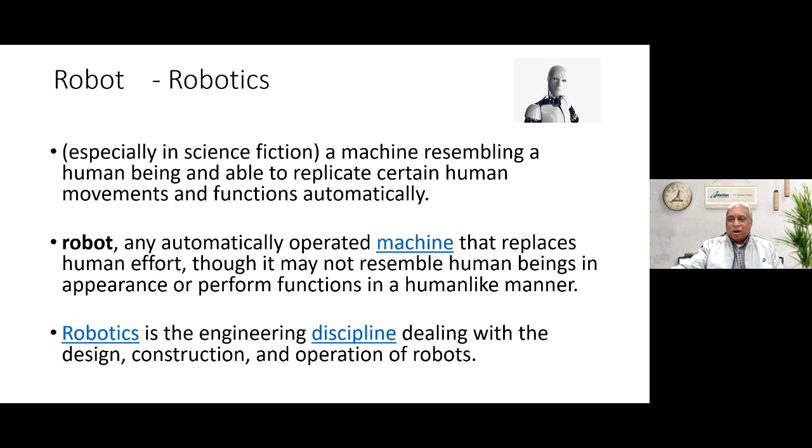The definition we gave for robots was that it's an automatically operated machine that replaces human effort, though it may not resemble human beings in appearance or perform functions in a human-like manner. Robotics is a branch of engineering discipline dealing with the design, construction, and operation of robots. That's what we talked about in the definitions yesterday. The Merriam-Webster definition was also reflected. Those joining today can refer to yesterday's presentations.

A very important thing as far as robot design, construction, and application is concerned: I'm repeating this because the standards for robotics are based on these laws only. Let's once again have a relook at it. A robot may not injure a human being or, through inaction, allow a human being to come to harm. This is law one, which must be followed if you want to design any robot.

The second law is: a robot must obey orders given by a human being, except where such orders would conflict with the first law. So law 2 says the robot must be under the control of the human, and it has to see that it doesn't violate or conflict with the first law. The third law states that a robot must protect its own existence as long as such protection does not conflict with the first and second laws.

So these are the three laws that have been defined over a period of time. We all know that laws need to change over time, so from a futuristic point of view, these laws are to be modified, or some amendment or addition has to be made as part of it.

With the help of new generation IT technology, you can design the robot and the robot can speak in any language, right? But what kind of vocabulary are you feeding into it? And if you want to do translation, how does it happen?

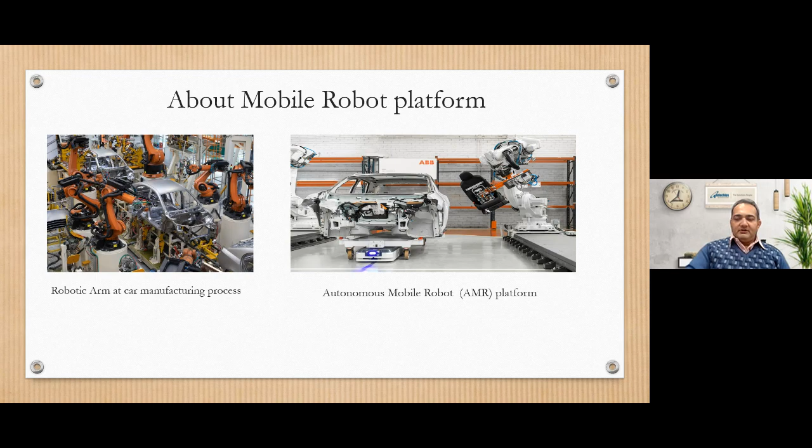So the entire car or any particular tools or objects in the industry are lifted by these particular mobile robots. You've also seen transportation and courier industries using mobile robot platforms which navigate couriers and everything from one place to another. So those are the applications regarding mobile robot platforms.

Whenever you purchase any mobile robot platform, you need to define your application, and based on that, what surface area you want to move the robot on - if it's industry, a rough area, a garden, or floor-based applications. In that case, three, four, or five different kinds of mobile robot platforms exist in the world. First we'll talk about the generalized idea.

I'm going to give you the differential drive - what differentiates this platform from others, and how they provide motion. Motion means you need to move forward, backward, left and right, and in any direction, just like any mobile robot platform moves in your industrial office area. So differential drive means what?

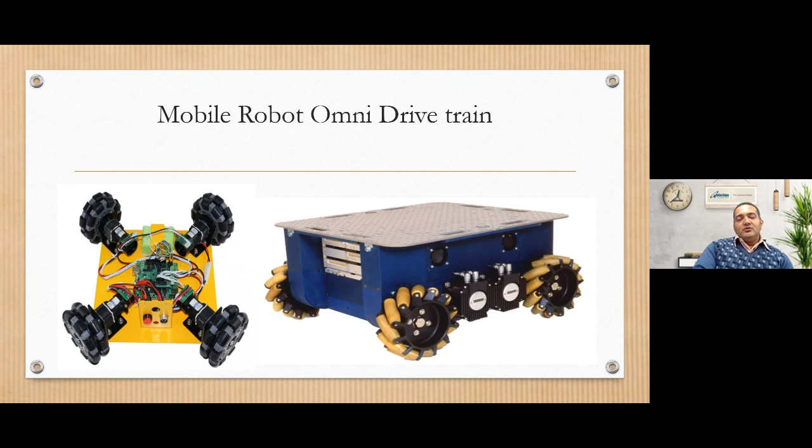The rubber rollers are free to rotate and they help the wheel rotate even when perpendicular to the surface floor, so it can work on almost any floor kind of mechanism. However, it is restricted to smoother floors, and that kind of requirement is there.

The fourth one is rotatable at the same position. That means you can change the direction of each wheel in a particular direction, say clockwise, so it rotates on its own position. It's not going to maneuver forward, left, right, or backward. It just rotates entirely 180 degrees or 160 degrees, whatever you require, at the same position.

This makes it easier to maneuver this kind of mobile robot platform on different floor plans. That is why this kind of mobile robot is accepted by many industries right now, because they are easy to maneuver. So I'm going to show you a demo video of this same omni-wheel drive mobile robot platform from our college premises, so you can see how it moves.

There is no sensor attached to it, so it's not going to consider or see any particular obstacle nearby. It may get stuck with anything, but two different types of robot motion are possible using this kind of omni wheels, as you can see.

So my focus is that you concentrate over here on how the direction of each motor of each wheel is controlled, as well as which motors are stopped and which are not stopped, in such a way as to maneuver in any direction. So just look through the video.

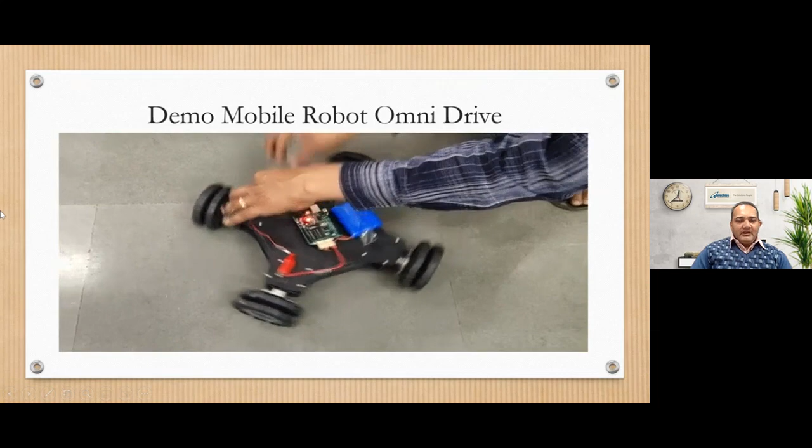It will be running at a faster speed. It's rotating at the same place, clockwise, anti-clockwise, diagonally.

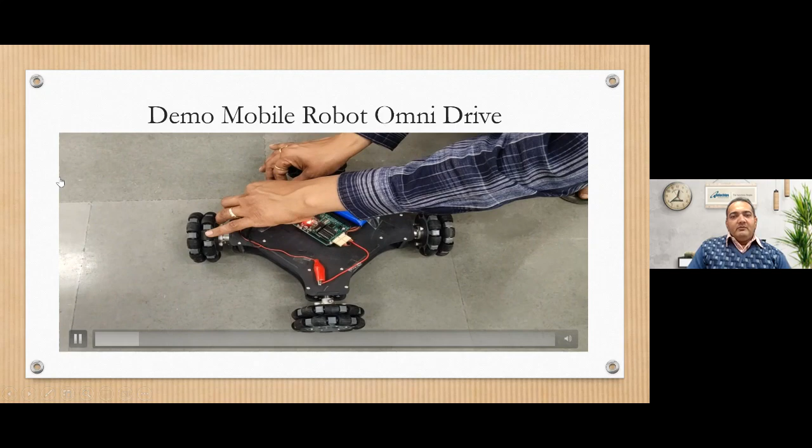As you can see, it is very easy to maneuver this kind of mobile robot platform in any industrial setting. Why? Because it can rotate clockwise, anti-clockwise, or any direction from a given starting position to any ending position. There is no restriction to maneuver them in any direction. But these are special types of wheels, so they are restricted by the floor plan—it has to be smoother. That is the only restriction. It cannot run on a muddy area because there are rubber rollers in between the robot wheel body.

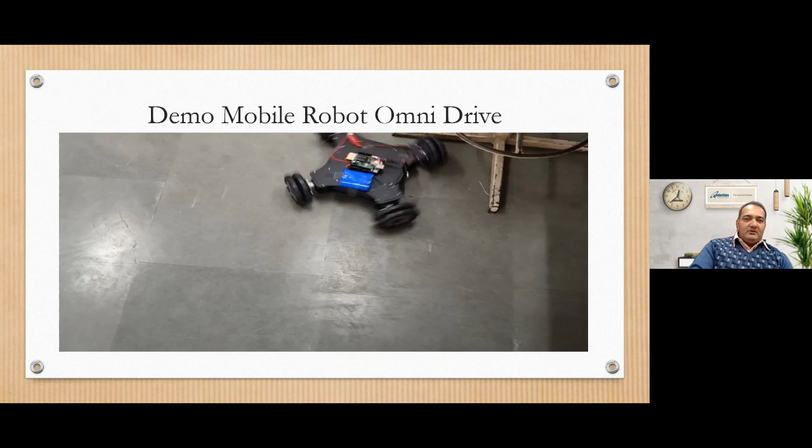You may have seen this kind of robot in restaurants—they come from a starting area to your table, moving only along the guided path in the floor, and that is why they are restricted; they will stop if someone comes in between them. The tracks need to be well defined, and this works well when your industrial plan is fixed for an entire season or for infinite time. But whenever you change your plan or modify your path, this kind of AGV becomes very difficult because you need to change the entire floor plan again to maneuver from point A to a new point C.

So the future is coming like the autonomous mobile robot, AMR. Now people are going to trackless autonomous navigation. They can travel around people and obstacles, and no infrastructure change is required—you can expand or modify them. There is no restriction, only some programming is needed, and they can maneuver within your given new modified floor plan or whatever industrial floor plan has been given. So dynamic navigation is the facility that the autonomous mobile robot provides, and that is why people are moving towards that, because they can maneuver anywhere considering all the decision making of the robot platform.

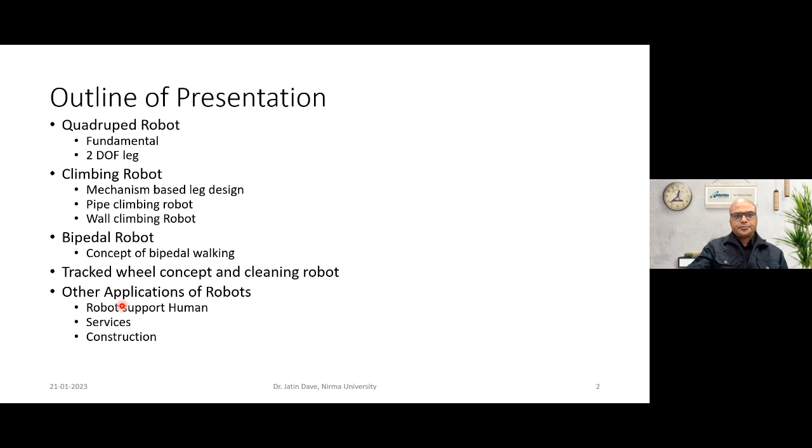Now you have gone through so many classifications in these 2 days, and you are fully aware of the kind of robots which can be implemented nowadays in societal applications, industry applications, defense, etc. Specific to legged robot, from these two initial classifications, manipulator and mobile robot, where mobile robot again has a major classification under wheel, track robot, and leg robot. Leg robot also we can see can be classified into two-leg robot, which is popularly known as bipedal robot.

Quadruped robots are very popular in industry. Many companies like Boston Dynamics and many other companies have already made beautiful robots working commercially. Some of the work is already done in hexapedal robot, which is a 6-leg robot having more stability aspect. Octopod also being used by researchers in many applications.

And we can see that looking at terrain adaptability, energy efficiency, and maneuverability on rough terrain, legged robots are preferred many times over wheeled robots. But of course, it costs you mathematical complications, complex equations, very complicated control aspects, etc. But it depends on your application and requirement, what kind of robot to be implemented.

You can also go through many researchers who are pioneers in the design of this kind of robot. McGhee was one of the researchers, which I didn't mention here, but Hirose is again one more pioneer in the quadruped robot. One of the statements you can find in his research work is that quadruped robot is the best form of legged robot from the aspect of stability, control difficulty, and manufacturing cost. That's why it is popular nowadays. You can see the very beautiful robots made by NASA and Boston Dynamics.

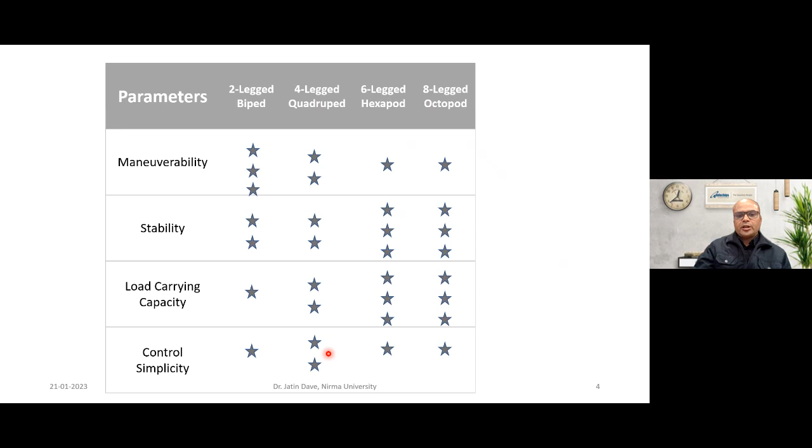While you will find this 4-legged robot, quadruped robot, will be in between all these other 3 kinds of robots. Maneuverability can achieve some sort of simplicity, and all kinds of orientations are possible. Stability will be slightly less compared to 6-leg and 8-leg robot because you have only 4 legs, and many times there is an issue with the center of gravity and the walking pattern. Load carrying capacity will be limited because you have only 4 legs and 4 points will be in touch with the ground, so that is going to limit your load carrying capacity. Control simplicity will be slightly achievable because you have 4 legs, and if you have a symmetric walking pattern, then your simplicity in control can be achieved.

If you want to go into this domain, what kind of research areas can you explore in legged robots more generally, not only limited to quadruped robots. You can start with understanding the walking of animals. Gaits are walking patterns - how do you sequence your steps, that is defined as a gait. Many varieties of gaits are implemented, like continuous and discontinuous, which we'll see defined in upcoming slides. People are also working on having all kinds of orientation while walking, which they call omnidirectional.

People also implement body sway motion while walking so that stability is achieved always. People also work in the area where if any legs are not working, they call it fault tolerance gaits - so even with 3 legs, the robot can work properly and you can retrieve your robot for maintenance purposes. You will also find research in slope and stair climbing.

Another issue is the control architecture - what kind of control, and nowadays how to implement AI and machine learning to work in uneven terrain or more complex working patterns. So these are all research areas you can explore later on if you are interested in legged robots.

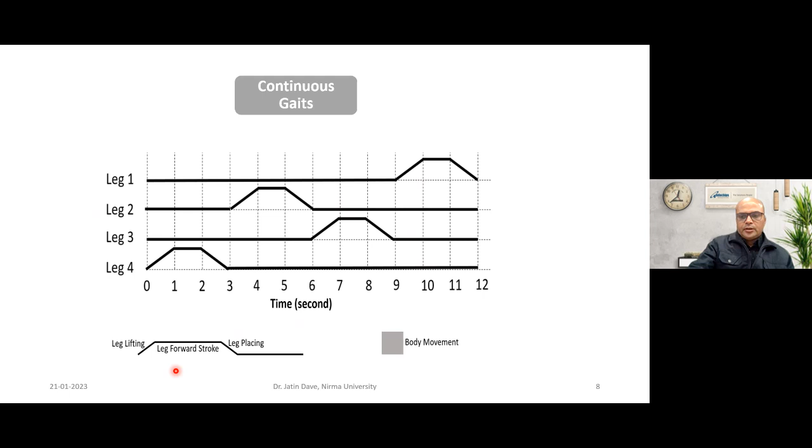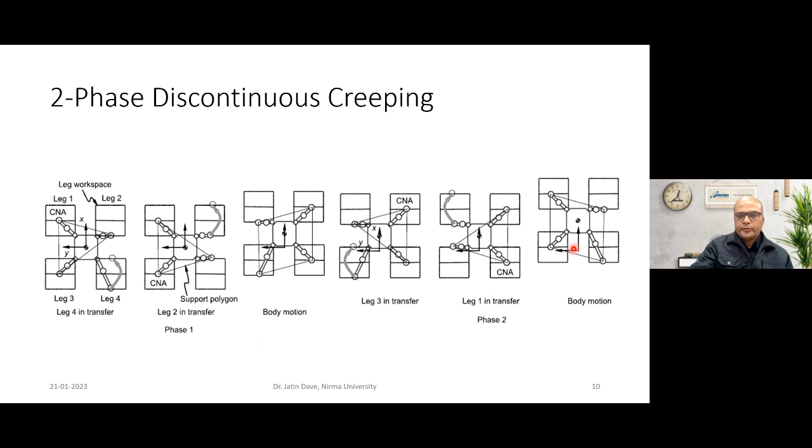Now the question is, how can you understand whether your motion will be stable or not? For that, people have used stability margin as a terminology. Stability margin shows the position of center of gravity. Now, as the statically stable gait, we defined that the center of gravity must remain inside the foot polygon, the polygon formed by the foot tips which are on the ground right now. You will achieve statically stable gait pattern always when your center of gravity remains always in the foot polygon. So it is statically stable stability margin, which is short called SM.

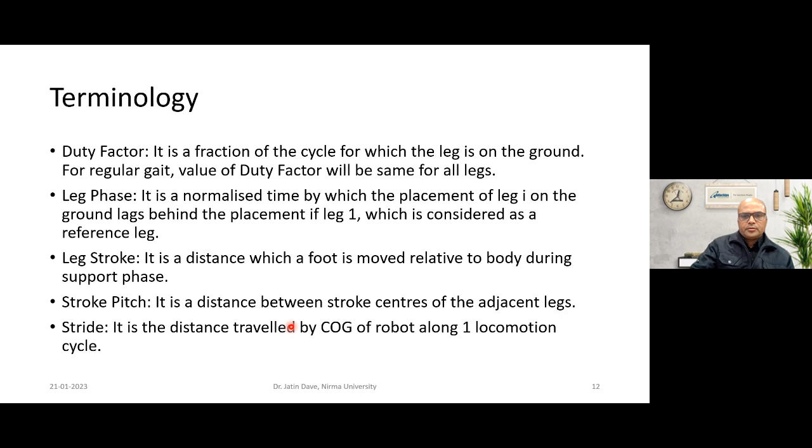Now let's go to some basics of geometric modeling, the coordinate system assignment, and how we can come out with the kinematic equations, etc.

You can provide symbolic variables like L, which shows the body length, and W, the body width. Then Rx and Ry are your workspace distances. Rx is the distance of the workspace in the X direction, and Ry is the distance of the workspace in the Y direction. So Rx, Ry provide the leg workspace indication, whereas L and W provide the body size.

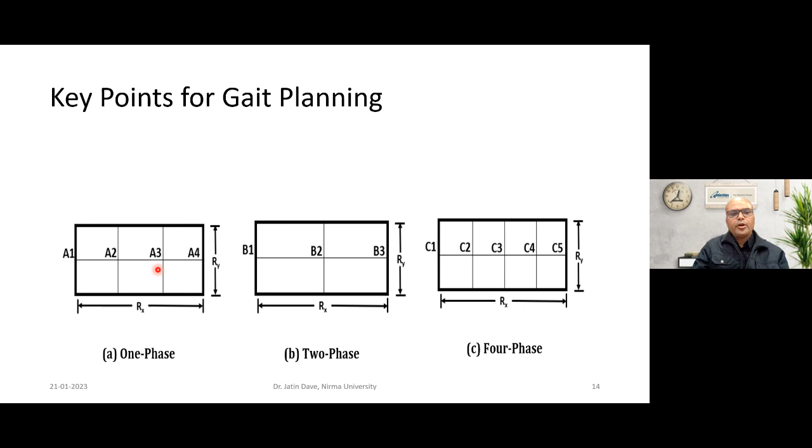Suppose this table shows the event sequence of one-phase discontinuous gait. Remember, our points will be A1, A2, A3, A4 in one phase cycle. Let's say we start at 0 seconds; 6 seconds is the time given for a leg to move forward. Let's say the event starts with leg number 3. Leg 3 will move from A1 to A3, whereas the other legs are on the ground at points A1, A2. You will have a similar workspace for each leg, and A1, A2, A3 are the points of the workspace, so A1 to A3 is the motion of leg number 3 in event number 1.

Then the event for leg number 4 will start; leg 4 will move from A2 to point A4, while the other legs remain on the ground. Similarly, leg number 2 will start, A1 to A3. After that, leg number 1 will start, A2 to A4. Now, as this is one phase, after the completion of all 4 leg motions, the body moves forward, and all 4 legs change position to the subsequent adjacent point. This cycle repeats after that.

Now let's go to 2 phase. From 2 phase, we know that the body has to move 2 times within the cycle. Let's say we start with leg number 4; leg number 4 will move from B1 to B3 point.

Leg number 2 moves from B1 to B3 point. After that, body motion takes place, so all leg points will change. Again, the remaining 2 legs, leg number 3 and leg number 1, will take place motion, and again the body will move forward. You will have coordinates each time, and these coordinates will help you identify the angle of a joint. Let us see what that is.

This table shows the 4-phase discontinuous gait. From the previous two tables, I hope you are able to understand how the motion takes place. The name indicates 4-phase, so after motion of each leg, body motion takes place. Leg number 4 motion, then body motion, leg number 2, again body motion, and it follows in a similar manner. So if you go for 1 phase, 2 phase, and 4 phase, your number of points will be increasing, and each time you have to do computation to find out the joint angle.

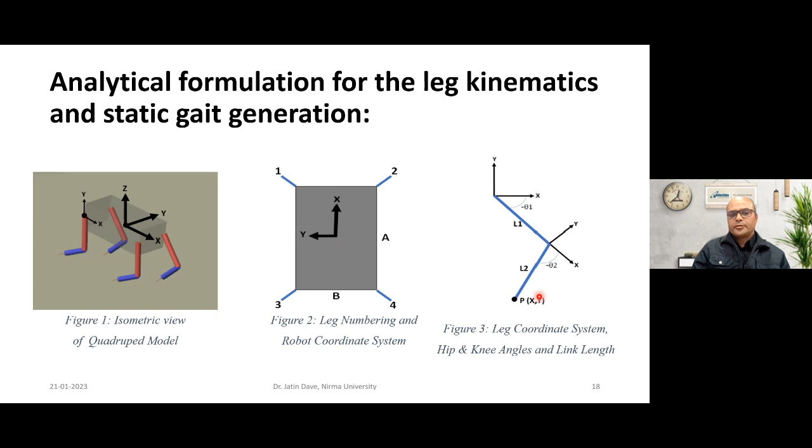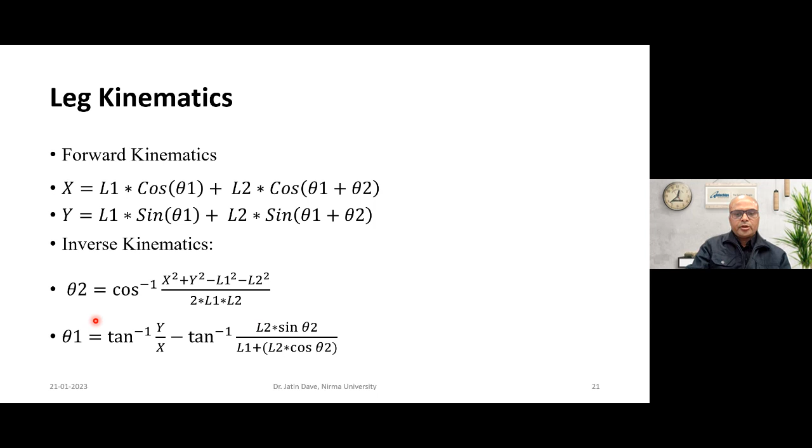From the table, our input is the coordinate x,y, and the length of links is known since we know the size of the robot, and from the available environment we can decide the dimension range of the robot. So x,y works as input. Our points 1D to 5D and 1U to 5U provide the value of x,y. This works as input to find theta2, and based on theta2 we find theta1. This is the inverse kinematics, and the values of joint angles theta1, theta2 will always be available to move the revolute joints and subsequently the body of the robot.

For example, we defined this terminology earlier. Duty factor, labeled as beta, is taken as 0.75. Leg stroke is 14 centimeters. Leg swing is defined as 4231, the gait pattern popularly labeled as wave gait. Leg phase: leg 1 is taken as reference and the ratio of the other 3 legs follows the 4231 sequence - 0.25, then 0.5 for leg number 2, 0.75 for leg number 3, with reference to leg number 1. Stride length is 14 and cycle time is taken as 12 seconds. Lambda is a factor defined by R divided by beta, which comes to 18.67.

Let's go further. Now how to implement this? Initially you have to work on paper to formulate your equations for the forward kinematic solution, then achieve the inverse kinematic solution. Then you know what coordinate values are required, so from the table you get the value of x,y for any selected phase - 1 phase, 2 phase, or 4 phase. Then you put everything into an algorithm form. Software can be anything like MATLAB, Python, or others as per your convenience, but an algorithm is required. Here MATLAB environment is taken to carry out the simulation, since MATLAB has a strong robotics toolbox, so we put everything in the robotics toolbox and do the coding.

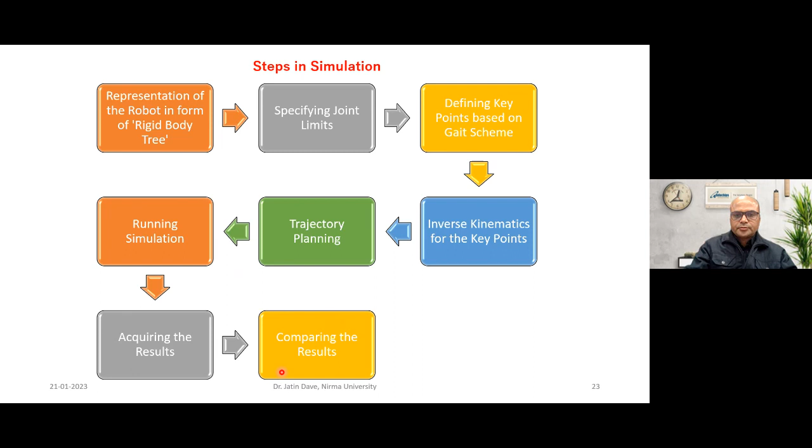Here the live coding I may not be able to show you, but a snapshot I have taken for your information.

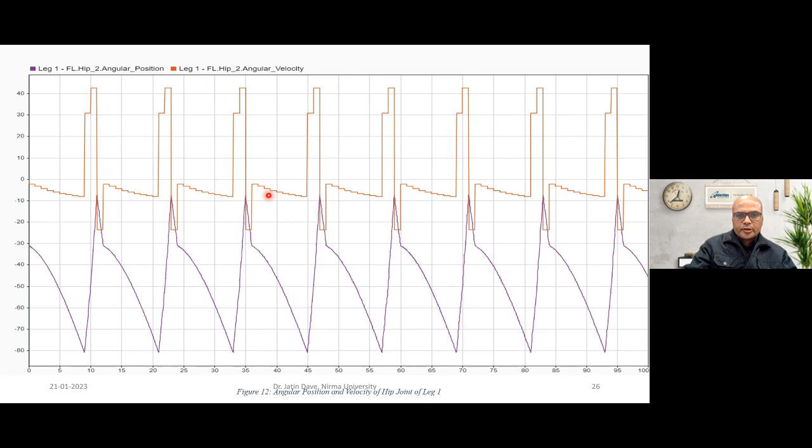This diagram shows the angular position variation, like leg 1 angle, which is a hip angle, then hip 2 angular velocity and leg 1 hip angular position. So angular position and angular velocity are plotted here. You can see that a symmetric pattern is followed for both angular position and angular velocity, which indicates that your motion is symmetric, following the sequence of the gait diagram designed by you. Also not having variation, so smooth motion of the robot will be achieved while completing the entire cycle. That is the gist of this analysis.

So we tried to implement this with a very simple fabricated initial robot. Let us see. We calculated all this in MATLAB, and then we interfaced the hardware, and we implemented the angle values, and you can see that statically stable motion is achieved here. Okay, let's move forward.

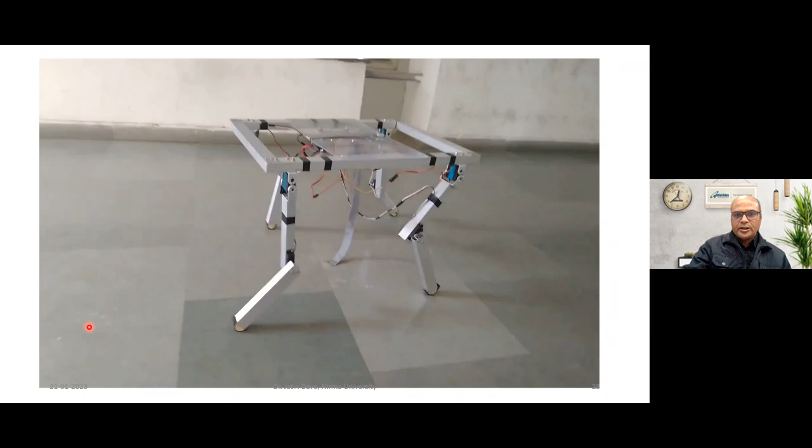This particular robot is made for a 3 degree of freedom leg. Each leg has 3 degrees of freedom, with 3 joints. You can see here we have vertical motion, then subsequently joint number 2 on the horizontal axis, and then joint number 3.

Here also we try to implement body sway motion. You can see that the body is also moving in a zigzag manner. Now it is going to the right side. Again, 2 subsequent legs move forward, then again the body goes to the left side. So body sway motion helps in maintaining stability.

You will get a beautiful robot, a beautiful design, from many research institutes like Boston Dynamics. But there is always scope for research, because we may not know what limitations they face. Only by doing research and thorough brainstorming are we able to know what kind of limitations are imposed on all these commercially available robots. They look very good in moving, but when you start your research, you will always be able to find the research scope. And that's what we are doing right now.

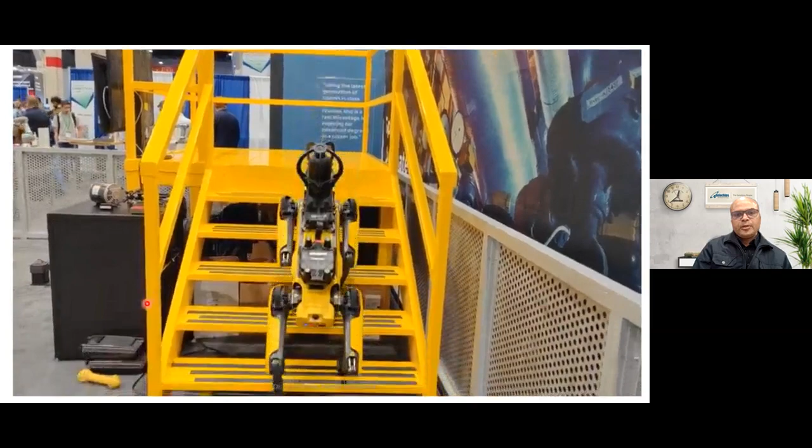This was the motion here. You can see that the body remains inclined, almost parallel to the slope of the stair. Sometimes while doing societal or industrial applications, when carrying a payload, we may not allow the body to be inclined. So you may think about how to maintain the body horizontal.

You have already worked on that. In this presentation, I have not kept all the research aspects. My purpose is to provide you the case study here, which could be simple for you to understand.

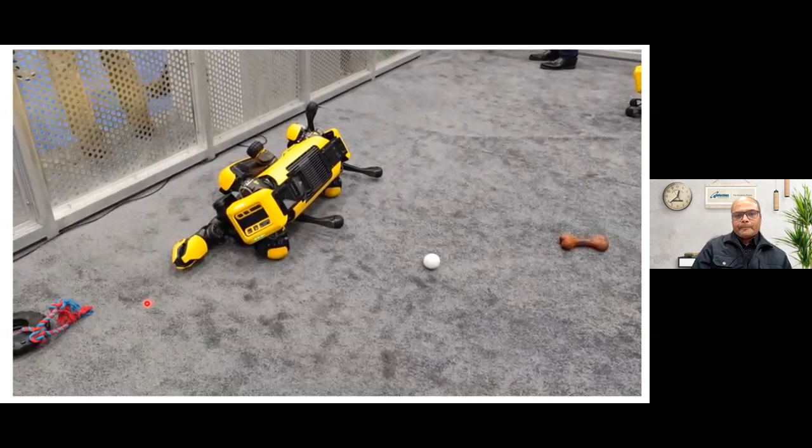So kinematics is the first step, then control comes into picture. You can see the complex control implemented here. That was the task of other team members who belong to instrumentation and electronics. It's entire teamwork, not the work of one man. You need a team.

Other case study which I would like to show is mainly structural climbing robot. This area is also very important, looking to the manpower requirement, safety of the manpower, reducing repetitive nature, and also providing assistance to the manpower which are climbing on a variety of structures.

You can take the case of a tree climbing robot where people go to great heights to pluck fruits like coconut. People also go to height to carry out maintenance work. Frequently, people cannot go up and down repeatedly. So if you devise some kind of robot which can go upward and provide assistance to the human, it will be very helpful to society.

So this is a kind of introduction which provides you motivation to work in this area. Risking human lives is the foremost motivation for us.

The example taken here is the telecom market. Many tasks are predefined. You need to follow steps to carry out maintenance, and we can take help of automation and robotics to carry out all these tasks.

If you go to do research in finding what kind of climbing robots are available, you will get a lot of variety. People all over the world are working here. But climbing robots are very challenging, so you will always find a research gap, and you can define your own objective and propose something which can be helpful to people.

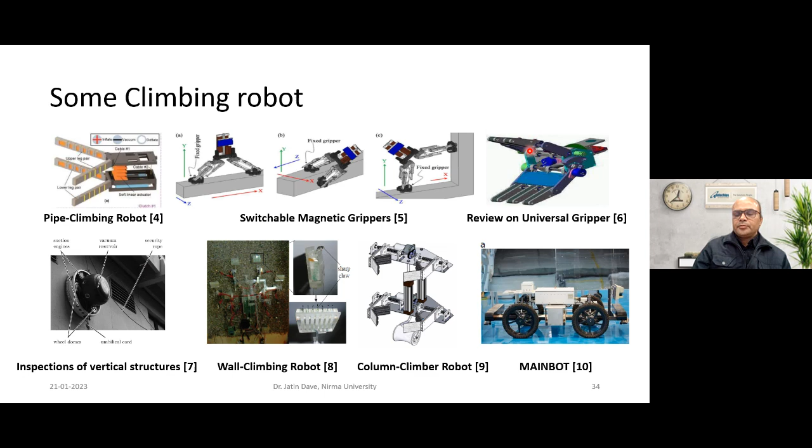So the problem statement is shown here. Particularly, as I told you, the concept taken here is to climb a ladder, which will help to do some kind of repetitive work for climbing the ladder of a telecom tower. And you are very well aware that climbing a telecom tower is very difficult, risking human lives.

Injury takes place. Carnivorous birds may be present at height. Weather conditions, electric shocks, burning of the telecom tower, which costs very costly instruments. So it's very important for us to come out with some kind of robotic application.

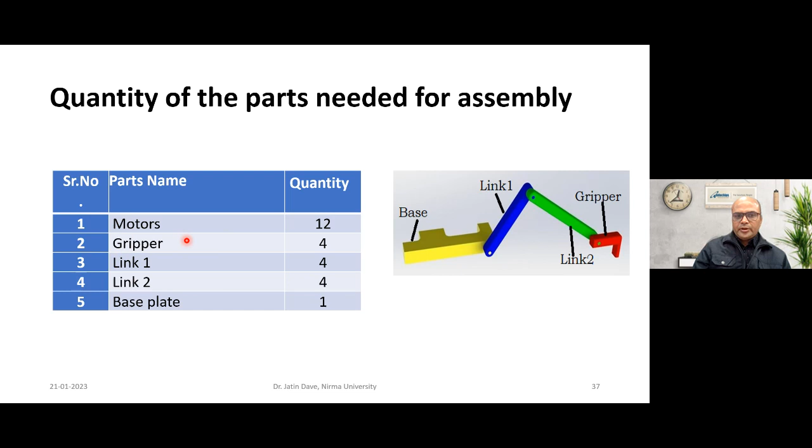Components are listed here, which of course we have not successfully implemented so far, but we try to implement in our study. Initially we have taken only a few components because concept implementation is very important in our initial phase. So our purpose is to design the gripper. As I told you, it is important. Other components can be taken care of, but gripper design is important.

Now, being a mechanical guy, I always start with mathematical modeling. From the basics of robotics, if you study robotics, you know the DH table, the Denavit-Hartenberg table. Denavit and Hartenberg were very important researchers in the 20th century. They provided a way of analyzing motion in 3 dimensions.

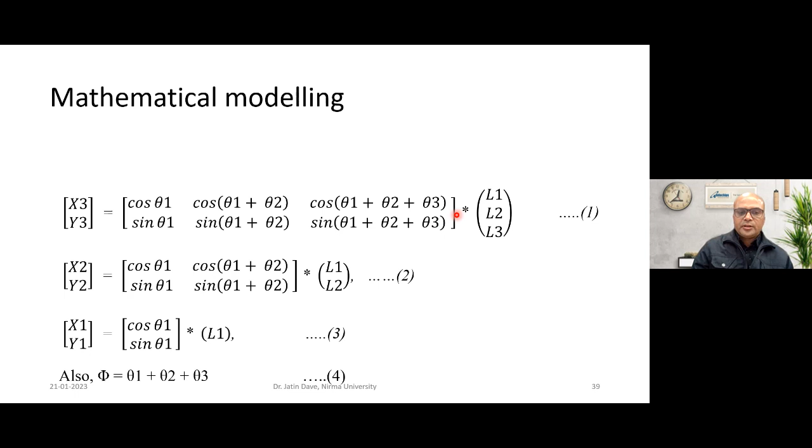This robot has 3 joints, so your mathematical model will be in terms of a matrix. Our ultimate goal is to know the XY location. So the ultimate matrix you will find is in terms of XY location here, showing the location of point number 1, point number 2, and point number 3, each as a function of the 3 joint angles, theta 1, theta 2, and theta 3.

Now it's important to know the value of joint angles always, because points are working as input. In the previous example also, I showed you that XY locations are input to us. Our interest is to know theta 1, theta 2 and theta 3, so that this works as input in our controller and subsequently runs an actuator for us.

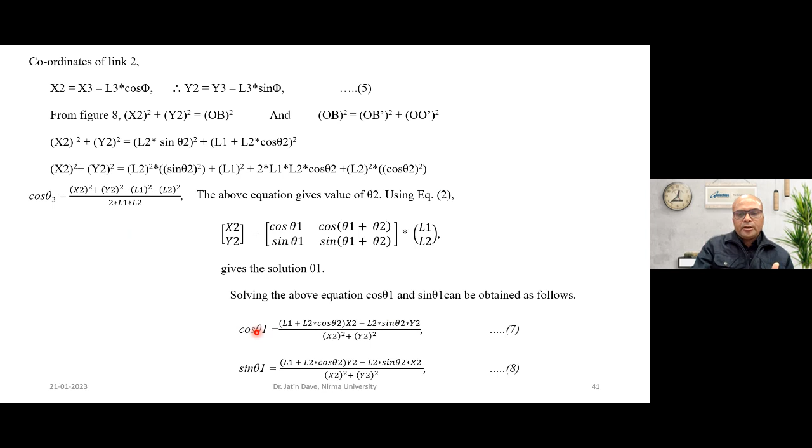By going through the inverse kinematics concept, we are able to know the equation for theta 2. Here also you can see that x2y2 is the input. Then subsequently, moving from theta 2, you are able to know the solution of theta 1 and subsequently get the value of theta 3. So once you know the equations to solve theta 2, theta 1 and theta 3, it is very easy to convert your equation into an algorithm form, write a program, run the program, get the value of the angle, and then interface your device to actuate your servo motors.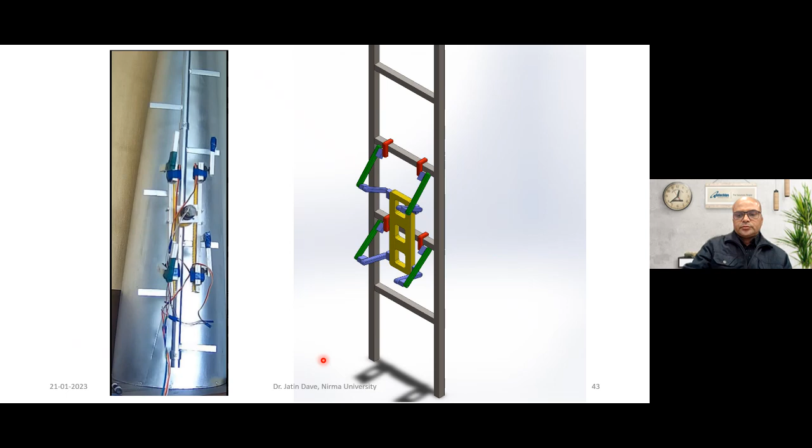Another research area is the pipe climber robot. You will find a lot of tanks, very huge tanks, maybe very huge in height and also depth - underground tanks for storage of normal liquids, industrial liquids, or very hazardous liquids. So it's always a problem for humans to carry out maintenance, to carry out inspection, to go inside and see the condition of our devices, etc.

You will find a lot of companies, not only in the world, but in India as well as in Gujarat. This Gridbot company is in Gujarat, near Ahmedabad, which is in the area of fabricating robots like this. So one application of this company is the pipe climber.

It is designed for magnetic surfaces. You can see that ferrous material is used here - a magnetic pipe surface robot with a payload up to 5 kg. Most extreme temperature surface conditions are taken care of here. It is mainly for surface inspection, weld inspection, painting, coating, grinding, etc.

They are using a geared motor, a pedometer, an IMU sensor to track the motion, etc., and also ultrasonic sensors to measure the tube thickness, reporting in real time based on computation. So many other concepts we can implement with reference to measurement, data transfer, etc., as per your application. But coming up with the concept is important for us.

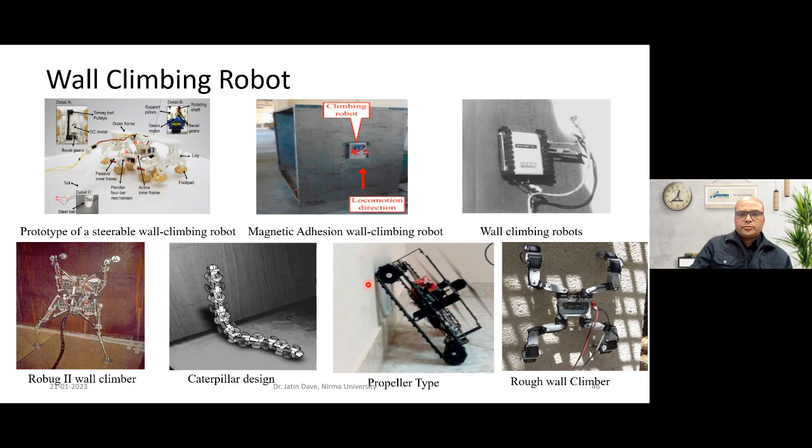One case study I would like to take here is the simple design of a wall climbing robot. Of course, equations will come into play, and mathematics will be involved. The equations will be very difficult for you, but I will help you understand how to begin, as I'm dealing with a case study.

Coordinate systems are always required, whether you work with an industrial manipulator robot or a mobile robot. Again, in mobile robots, whether you work with a leg robot or a wheel robot, a coordinate system is always required to map your coordinate with the global coordinate system, down to the coordinate system of the wheel or leg, which will be changing always. So you need the solution of forward kinematics, and you also need a dynamic equation to understand the variation of torque in each wheel.

Also the requirement of velocity and acceleration of the entire robot. A popular mathematical formulation is the Euler-Lagrangian formulation, which helps you arrive at the dynamic model of the robot, and that will ultimately provide you the torque variation. The coordinate system is shown here in this figure, and now I will show you the equations directly, how this Euler-Lagrangian formulation is implemented.

This Euler-Lagrangian equation requires kinetic energy and potential energy. Kinetic energy combines both linear motion as well as angular motion. The angular motion will be in the wheel, so 1/2 I omega square is the kinetic energy that comes from the wheel.

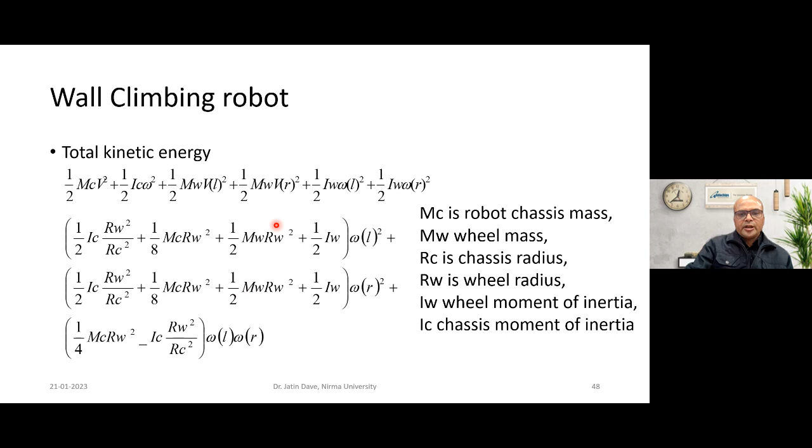Then mgy is the only potential energy. So you take your kinetic energy from the previous equation and this potential energy from the height achieved by the robot, which is y, and mg provides the weight of the robot. Let me show you the equation if possible here.

I will try to write it in a rough manner here. So your Lagrangian equation will be something like this—it's a partial differential equation with respect to time, with the Lagrangian equation denoted by L. So it is d/dt of (dL/d theta dot) minus dL/d theta.

Okay, that is equal to our force or torque value. Parameter L is called the Lagrangian operator, which is given by the difference of kinetic energy and potential energy. So first you obtain parameter L, and then you apply this equation to know what is the force and torque value. So like this you are able to get the required dynamic equation to know the torque value.

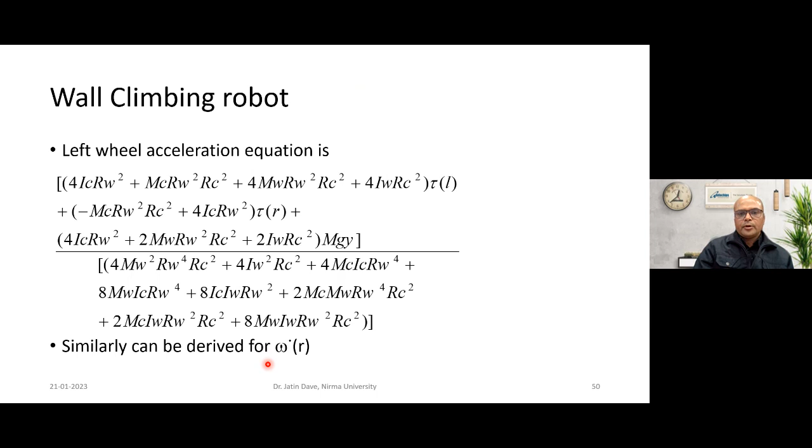That is what we have done here. We obtain acceleration value from this equation for left wheel as well as right wheel, and then it is given in Newton's second law of motion, because torque is equal to I into omega dot, or F is equal to ma. So that will give us the required torque value. So linear acceleration is obtained, angular acceleration is obtained, ultimately force and torques are obtained to know what is the actuator requirement in this wall climbing robot.

Further, you need to know what kind of forces you may come across while climbing on the wall. This FA is the adhesion force, because you are selecting a centrifugal rotor to create a vacuum. So you must know what is the pressure requirement, so that you are able to create the vacuum and select the proper fan, and know what rotational velocity is required to create a vacuum. For that, this adhesion force is the foremost parameter required.

You also need to know what kind of opposite reaction will be obtained. So FSB is the reaction force. Further, we also need to know what friction we have to come across. So this Ff_eb shows the friction force that is required, and this Fs_eb is the normal reaction force, based on the friction value. G is the weight of the body, which is always going downward, opposite to motion.

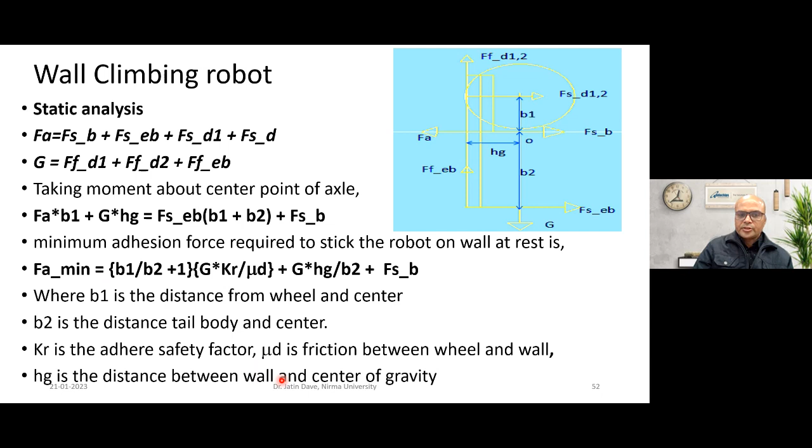We keep G and Kr constant, and we can come out with some conclusion. So to minimize the required necessary adhesion force, the ratio of b1 by b2 should be as small as possible. It will cause more driving force on the wheel tire. That is our observation here in this project.

Some reduction in Hg is also another option, reducing the distance between the wall and center of gravity, because as you are nearer to the wall, you can easily provide suction, but it is limited to your design. Sufficient suction should reduce the support body force as much as possible, and G is the gravity force. These are the nomenclature used here, so these are our observations in this equation.

Dynamic analysis is also implemented here using the d'Alembert principle. We have taken four components in this equation: gravity of the system G, contact body sliding friction Fs, edge body sliding friction EF/EB, and inertia force Ma. From this, we are able to derive some conclusions.

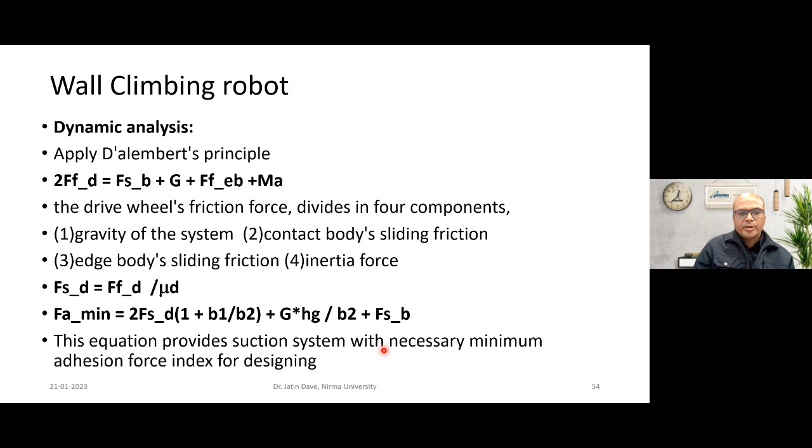This equation provides the suction system with the necessary minimum adhesion force index for designing. So ultimately we are able to know what is the adhesion force, and what is the requirement for creating suction pressure.

From this, we are able to select the proper rotor and determine its RPM. Accordingly, from the torque available from the dynamic equation and the dynamic analysis, we are able to select the proper drive motors which will take your robot either upward or downward of the wall. So these are the initial mechanical analysis required before you go into the other electronics interfacing aspect.

The third case I would like to take is how to go into bipedal motion. Again, the very popular Boston Dynamics robot is shown here, but we are learning, so you must know the fundamentals when you go into designing.

If you understand human walking, when we take one leg in the air, the other leg is on the ground. That means we are in a single support phase - one foot is in the air, the other foot is on the support.

Then we put our other leg on the ground and move slightly forward before going to the second leg, and in this manner we move forward, and our brain maintains stability always. So this is the normal motion.

When both legs are on the ground and your CG slightly moves forward, it is the double support phase - both legs are on the ground. So ultimately you need equations to analyze single support motion and double support motion. That is the entire logic and engineering understanding working behind this.

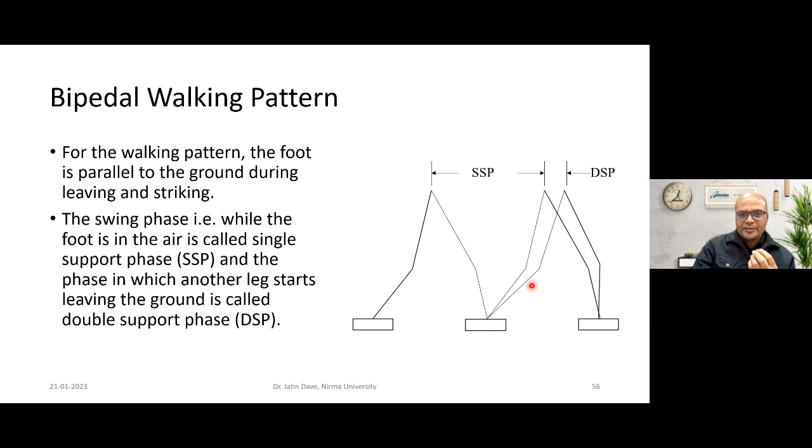People popularly take the inverted pendulum model or the linear pendulum model to simplify the control equation to arrive at the dynamic equation. Initially, in single support phase, one leg is on the ground, the other leg is in motion, so it is an inverted pendulum - we are only on one leg and our entire body is swinging. So it's a single support phase.

Then both legs are on the ground and the body is moving, so you are like a simple pendulum - that is the double support phase. This cycle repeats: single support phase, double support phase, single support phase, double support phase, in this manner.

So you can take the CG of the human body. You have weight working downward, and you have inertia force opposite to your motion, which is mx double dot. Mg is your support. One popular term we come across in bipedal motion is the zero moment point.

The zero moment point is the point on your foot when it is on the ground, and the moment about that point should always come to zero - the summation of all moments. That means this point ensures equilibrium, that is why it's called the zero moment point. Humans always have a zero moment point; nature has devised our motion such that our foot always ensures a zero moment point.

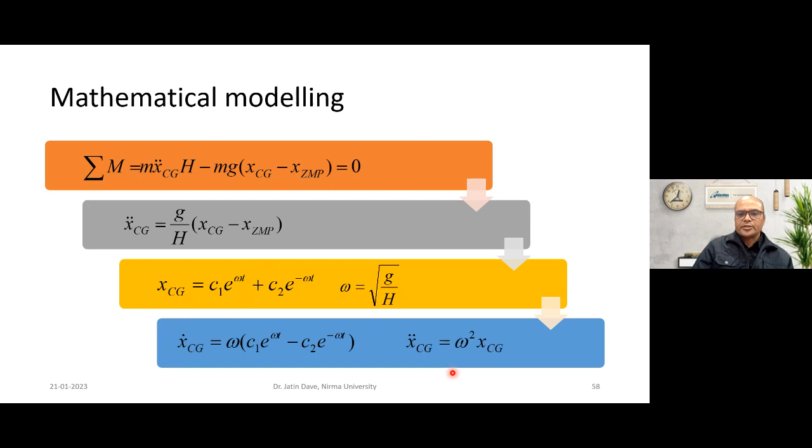It's just like our normal vibration problem, and you are able to very easily get C1, C2 by providing some boundary conditions - one boundary condition is not shown here. Based on this equation of Ax, you are able to get velocity and acceleration. So the rest of the task is very easy.

Now coming to the double support phase. Double support phase is a motion like a pendulum. You're able to get this kind of equation using the same approach: apply sigma M equal to 0, simplify the equation, and you get the equation of the double support phase.

In double support phase, both feet are on the ground, so whatever x is provided, that will be the zero moment point. Suffix d indicates double support phase. xd is the position of CG during double support phase, Hd is the distance between CG and tip of the pendulum, and x_zmpd is the position of the zero moment point during double support phase. Here, one constant ad is taken to govern the walking pattern.

The solution of this differential equation is well known to us from mathematics, so we are able to solve it.

We have the stride length, and we know the step length. So S works as the step length. I can divide the step length into two parts: the step length of single support phase and the step length of double support phase, and the summation of Ss and Sd gives the total step length. Alpha is based on the ad constant.

The previous slide defined ad, which governs your walking pattern, so you can take it as per your convenience. You just vary the value of ad and observe what kind of walking pattern results, stable or not stable, and from that Hd can be obtained. Hd is the height of the CG of the pendulum from the ground.

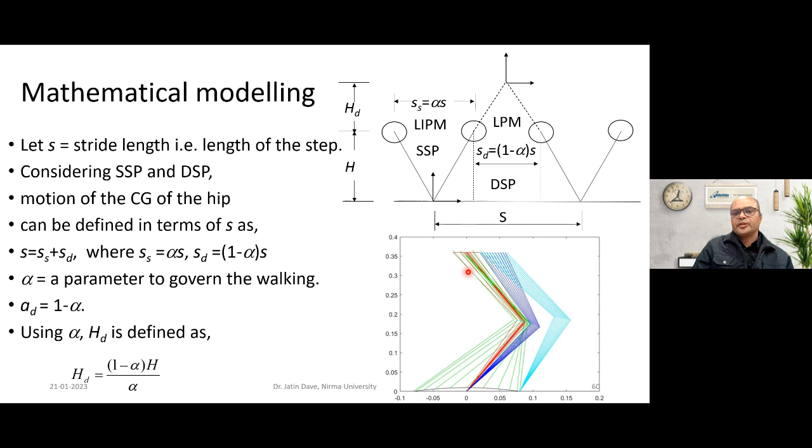We also tried to fabricate this kind of robot, not successful, but this is the list of components shown so that you know what kind of peripheral electronic devices are available. We tried a dynamixel motor here, batteries, and sensors are all shown here. A dual shaft metal gear motor is selected for this, along with a 3-axis linear accelerometer and a triple axis accelerometer gyro sensor.

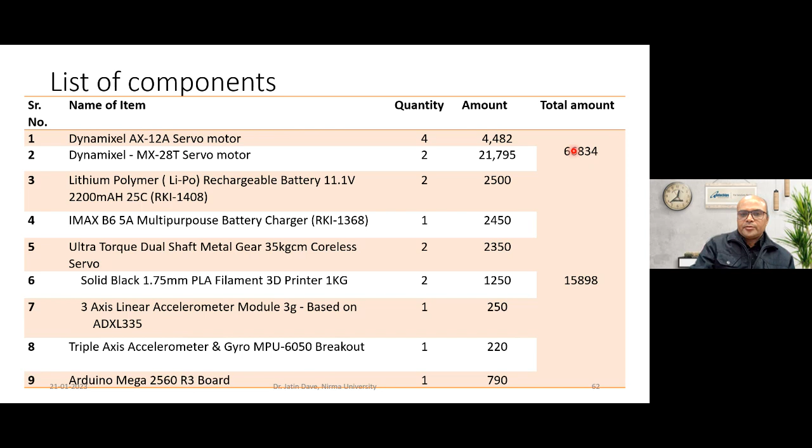An Arduino Mega is utilized here. Total costing comes around 80,000 for a small robot, so you'd need around 1 lakh at today's cost. This cost is from around 2017, and that snapshot is shown here.

Sometimes, we may take up that part also.

They implement ultraviolet disinfection, which can completely clean 99.9% of microorganisms in a hospital within 10 minutes, and use different kinds of sensors like lidar to create a map of the environment, etc.

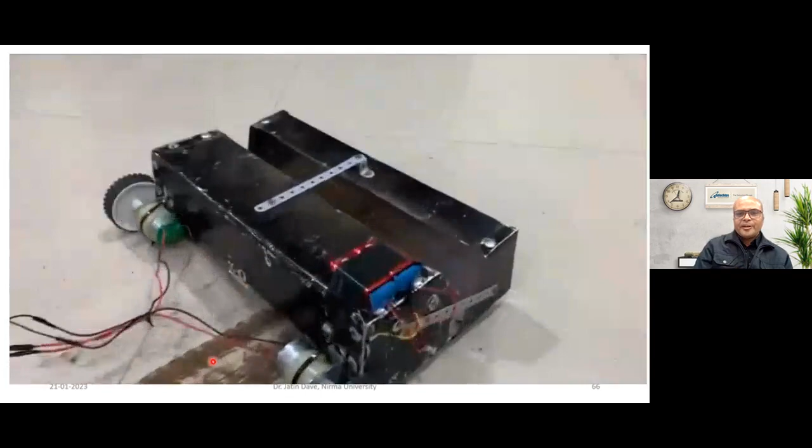We also tried to implement a cleaning robot in our laboratory on a small scale. Not many sensors are implemented here. We just tried to implement the motion initially, and it is also being extended by our other students to do it in a more sophisticated way.

UV is very popular in disinfection. Hydrogen peroxide and plasma air filtration are also utilized by people in some areas. Hydrogen peroxide misting is very effective for full surface coverage and is used for room service and deliveries in hotels. But we need to take care of safety while using these kinds of disinfection measures.

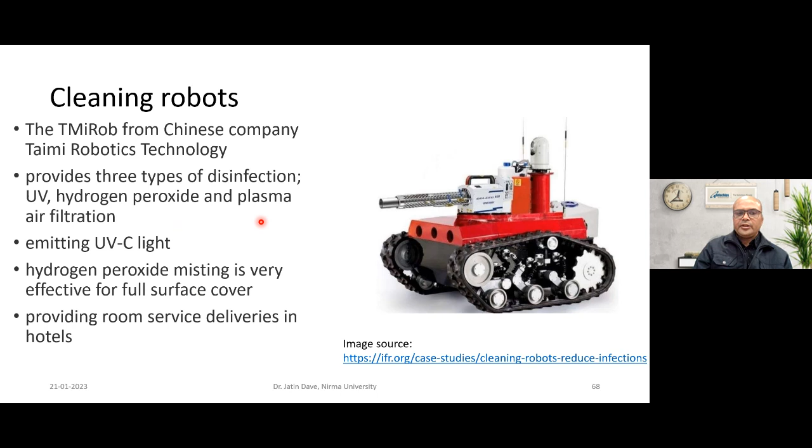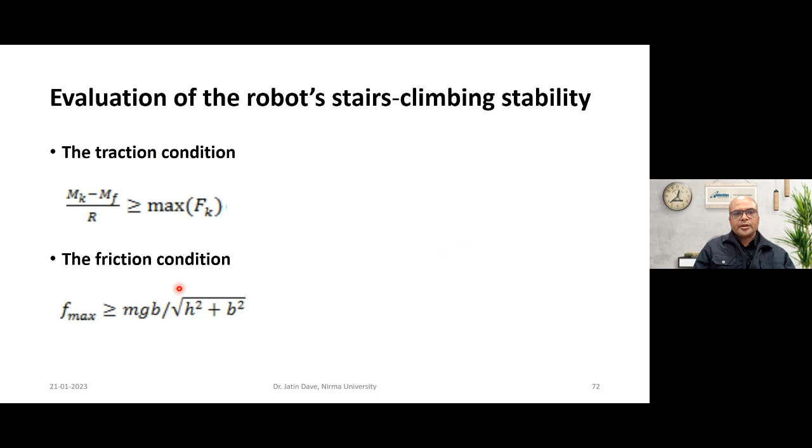Many kinds of helping robots are also nowadays available. So you have a wheelchair with a robotic arm implemented on it, providing a joystick or remote control in the hand of the person, and that person can easily move the robotic arm to do routine tasks.

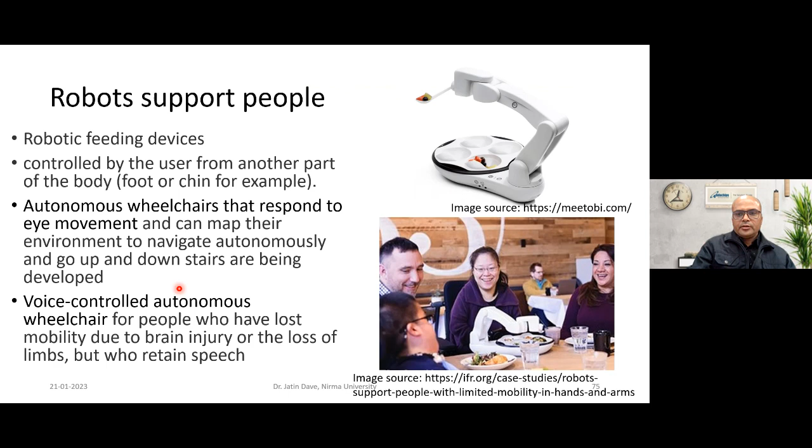People are also nowadays manufacturing feeding robots. Suppose the person is suffering from Parkinson's or a stroke, or doesn't have a hand - they feel very bad when they go outside. This kind of robot provides help and some emotional empathy aspect to these people. I'm not involved in all these projects, but I'm showing you slides to provide information on what we can do.

Our team also tried to make this kind of robot. Initially a 3D simulation of the feeding robot. A lot of kinematics is involved here, and genetic algorithm is implemented to smoothen the motion of the joint.

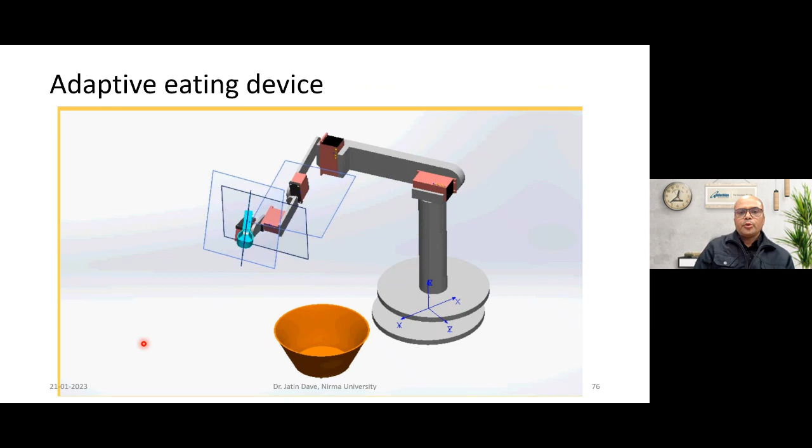Because you cannot allow the food to spill off from the spoon, to arrive at some optimum value of joint angle, genetic algorithm and other innovative techniques are implemented in solving this. Human testing is being carried out here.

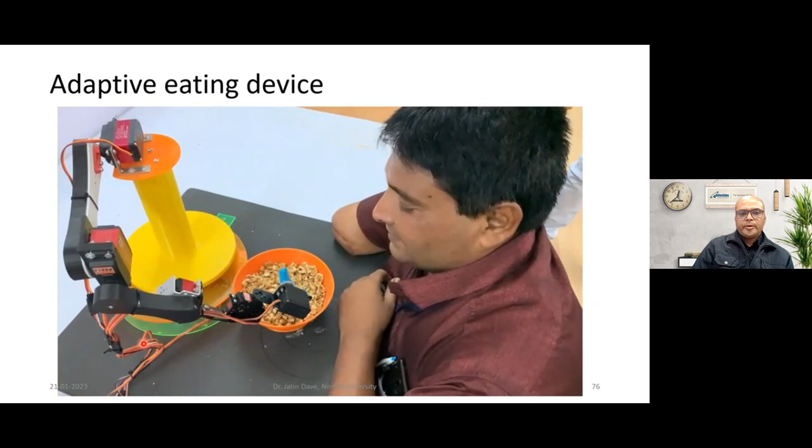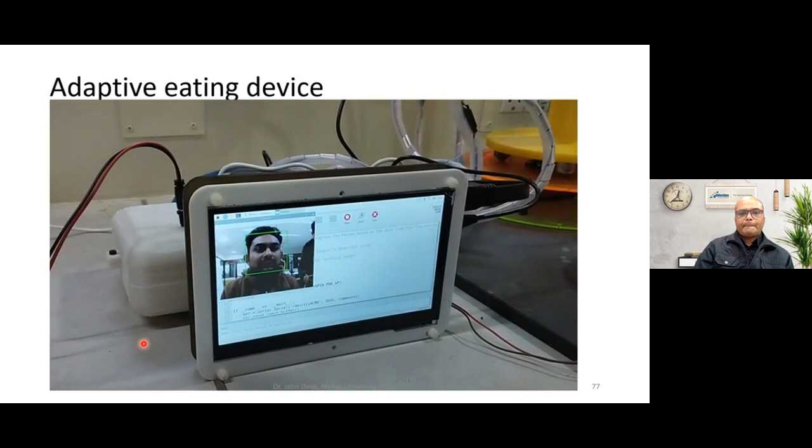This team also tried to implement image processing to calibrate the distance of a person from the robot, so the robot is automatically able to find the distance of the human's face, and accordingly the joint motion can be calibrated. This is the implementation of image processing here - the face is detected, and then the robot tries to implement the motion.

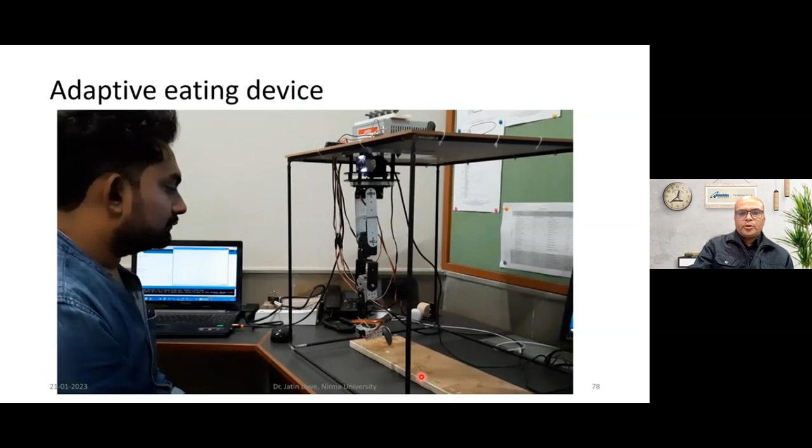People also work in soft robotics. Other people are working in this area, and our team also works in this area, but currently I have not brought all this material because they are not yet successfully implemented. We are still working in this area.

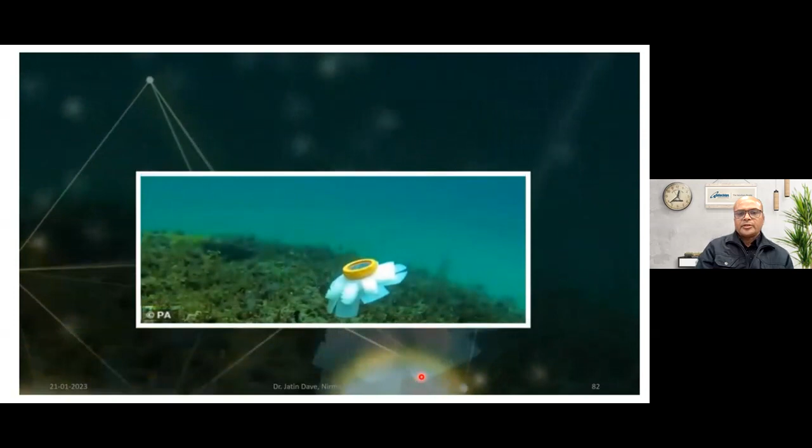Florida Atlantic University is working on soft robotic jellyfish. We have an MOU with FAU since long, and our students and faculty do exchange programs very frequently.

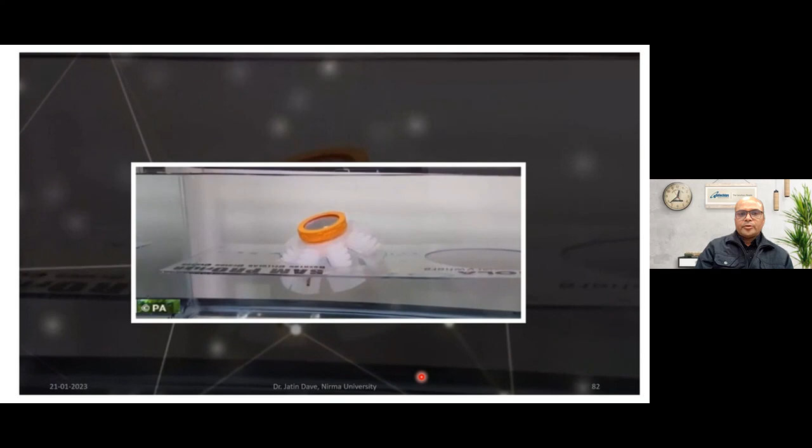You are able to find out what kind of materials and sensors are required for soft robotics, the calculation of buoyancy force, communication through water, and preventing electronics from water damage. All these are challenging tasks.

IIT Indore also tried to implement soft robotics with shape memory alloy. This concept from IIT Indore uses shape memory alloy, which is also one of the alternatives for working in this kind of robot.

Underwater robots are very popular. As I told you, in Gujarat, Ahmedabad, we have a company working in this area. These underwater robots use carbon fiber material. Thrusters are utilized to provide different motion, and a color camera is used to identify different colors and things underwater.

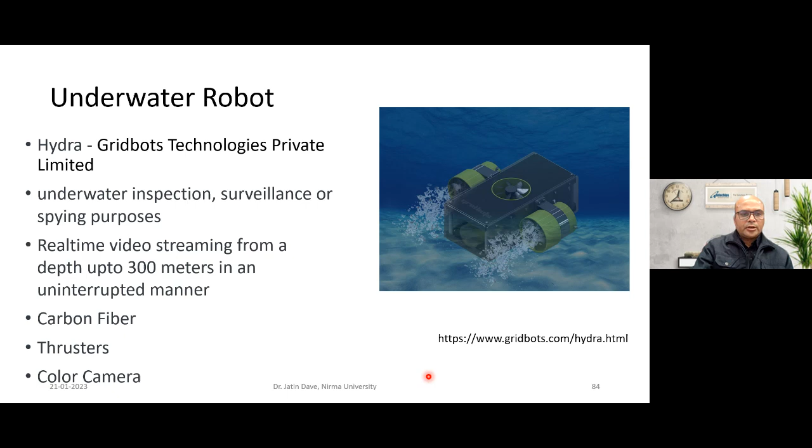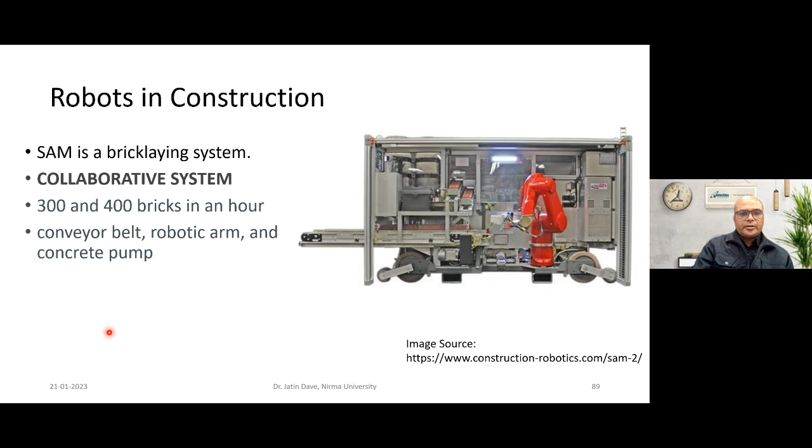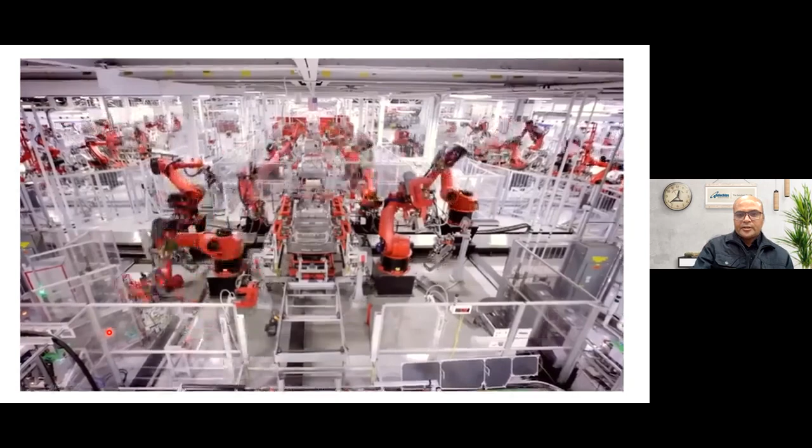Robots are also being utilized in construction. This is a construction robot - it's a manipulator, but you can design the gripper in such a way that it can be applied in construction. It automatically takes the mortar and places bricks in sequence. The challenge for civil and instrumentation people is to know what proportions are required to mix the cement, sand, etc. This can lead to a fully autonomous kind of application.

Personal mobility devices, like an autonomous wheelchair, are very popular. This is also something we can think about.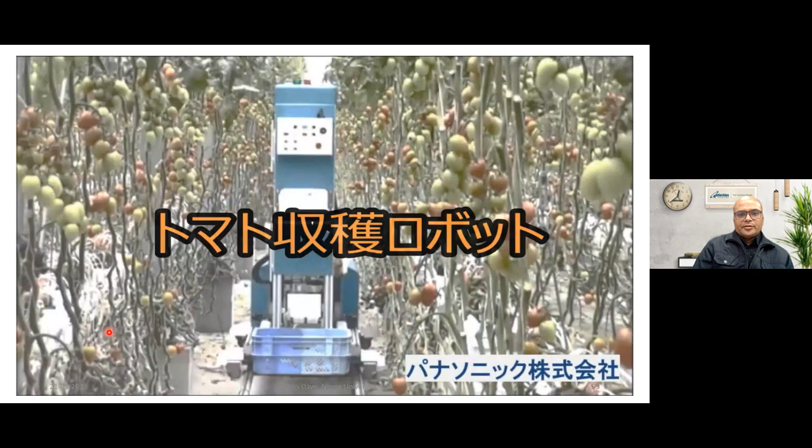This is a very interesting topic: the tomato harvesting robot. Let us see its video to understand more in detail. You may always have a scarcity of labor, and the time season is also varying nowadays. So we cannot always find people to move around the farm and find the completely ready available fruits and vegetables. See, it is only picking the red tomatoes.

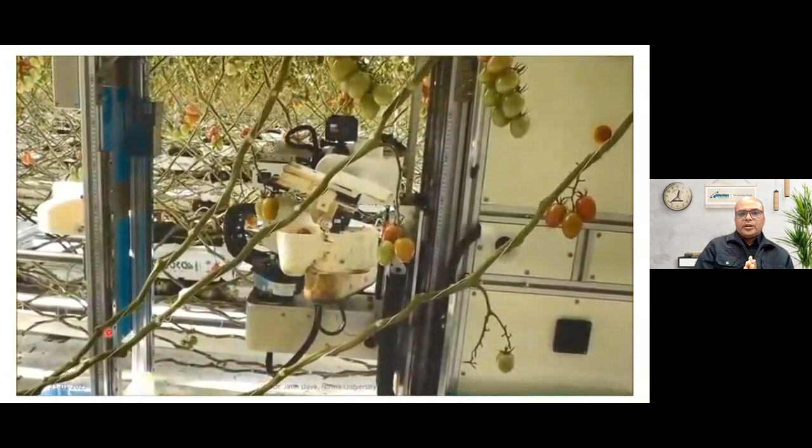Image processing is very strong here. It's a challenging task - you need some kind of algorithm and vision system to identify which tomato is grown and which is not, plus a plucking mechanism so it can pluck automatically and a storing system so it can be stored properly. It is very clearly visible that only red tomatoes are being taken here.

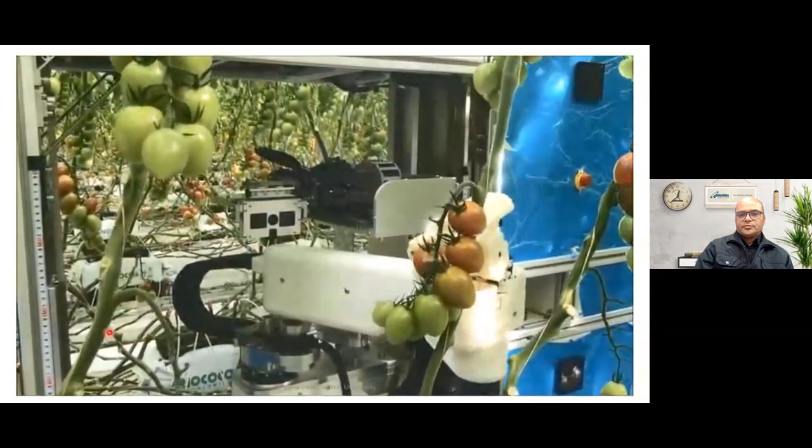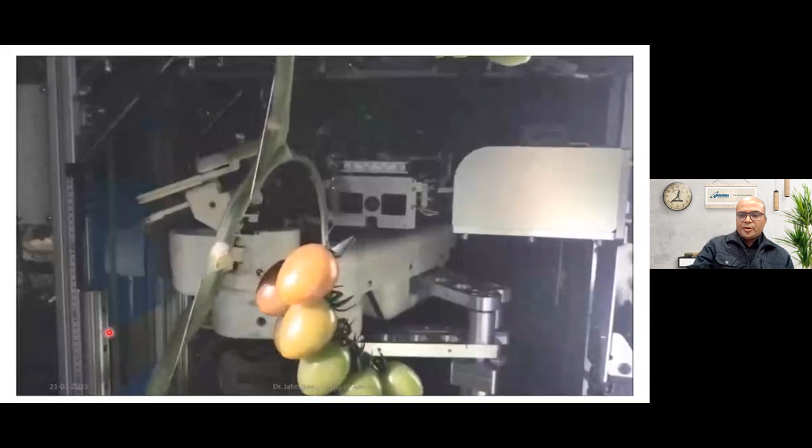Currently this robot is working on the ground, with a proper wheel system, track system, and manipulator available. But think about fruit that is at height, like coconut - people risk their lives climbing to the height to take coconuts, and the season is sometimes very bad. So think about how to implement this kind of mechanism for fruits or vegetables that are at height.

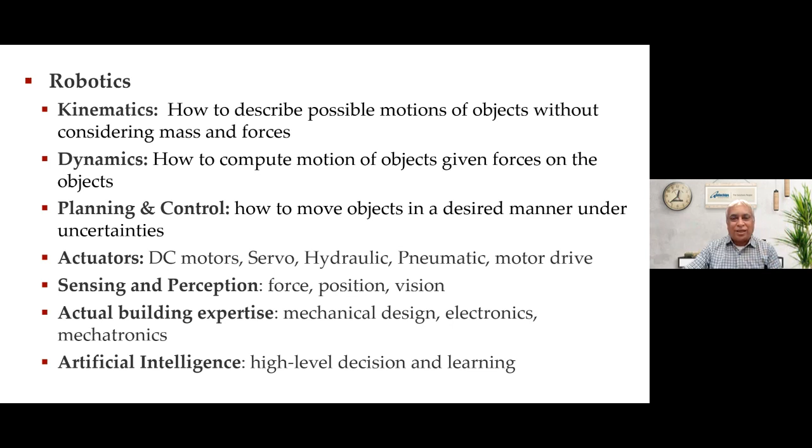So that's what is now - if you look at it, we cannot have just part 1 and part 2 of 5 hours to learn all of robotics. These are the individual domains that need to be expertise or need to be processed for the purpose of designing a robot. So what do we mean by ROS?

This has been specifically devised at the European Union, as part of their Horizon 2020 research project consortia. So robotic research problem number one: it is difficult to transfer research between institutes. Boston Dynamics is doing something, NASA is doing something, maybe at our place ISRO is doing something, DRDO is doing something, or Japanese companies are doing some kind of research work. Then it becomes little difficult to transfer the kind of research innovations that we have carried out.

Number two, the problem is it is very hard to reproduce the results. The results need to be compared, measured, and standardized, which becomes difficult at the robotics level. And the third problem is the software is not maintained or is outdated.

So the software needs to have version control systems, or what we call VCS. We are all a little aware of GitHub, which is an open source platform for maintaining our software. So given these problems existing in robotics, they have come up with an open framework for a robotic oriented middleware geared towards reusability - that's the purpose of bringing in the robot operating system.

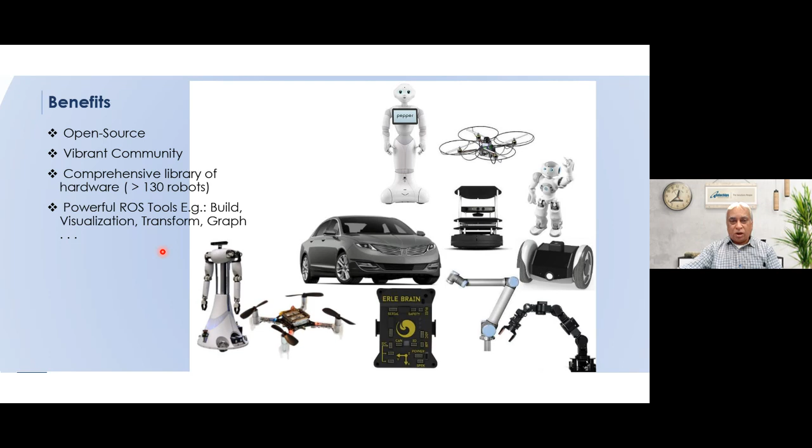And then you have powerful ROS tools, as I mentioned. You can do the build of your software systems, you have a visualization pattern. Dr. Dave has mentioned about the kind of simulation that you can do and visualize your trajectory and so on and so forth. Similarly, you can do the transformation and the graph. So these are some of the tools which are already existing as part of it.

Then the benefit is it has reusable fine-grained packages in a distributed system. It can support languages like C++, Python, Java, C, and so on and so forth. Maybe Amazon Robotics and Google are also working on some aspects of robotics for the purpose of some of the interfaces.

The open source interfaces which can also be used are OpenCV for image processing, Gazebo for simulation environment, and MoveIt for path planning. So these are the kind of benefits that you achieve, that you can use the spatial libraries and the platforms for the purpose of your robot design.

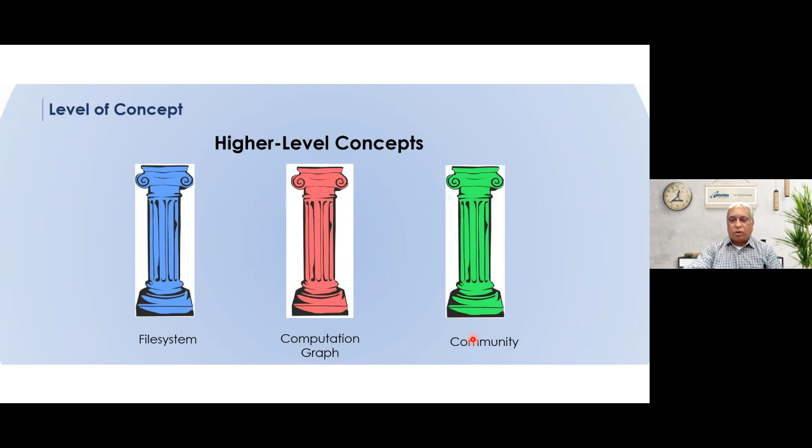So what are the level of concepts in the robot operating system? You need to look at a file system, computation graph, and community support. So if you look at it, through community resources you have ROS Answers and Discourse, ROS Wiki, and ROS News as a community resource pillar.

Wiki, just to give you, for time constraint I'm just keeping this slide brief. Robots and research - this is also, you have various distributions of ROS also available, right? So you can find it out from the prompt 'rosversion -d'. That will tell you what version distribution you're using. You can use it on Ubuntu 18.04 or 20.04 as the kind of platforms.

Advantages I've already mentioned about it. Applications has already been discussed. More details about the applications, you can go to discourse.ros.org, but you can have agriculture, medical services, autonomous driving, factory logistics, and many more in the field.

And the good part of it, this ROS can be ported on 130 different hardware robot platforms. And one of the popular ones, from the practical and academic point of view, is Turtlebot 3, which we also have at our Center for Robotics and Applications Automation.

So as I mentioned, ROS file system level computation communication - it has a package mechanism, so it is organized in the form of packages. Those who are familiar with operating systems, we have a package system for the purpose of integrating everything, and then it is to be deployed on the OS platform. So there you have hardware drivers, algorithms, visualization tool, and library, everything included inside.

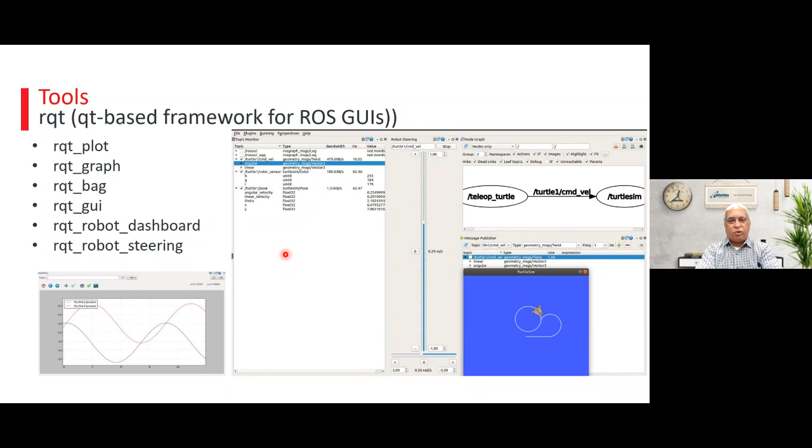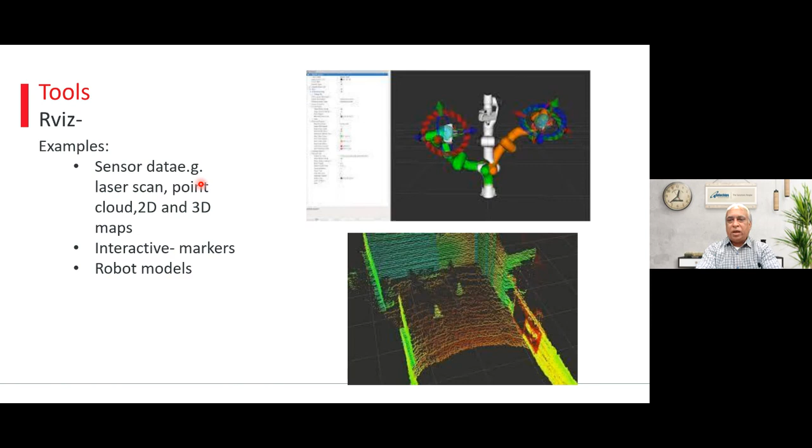Then you have RViz, which is an example of your visualization tool. So you have robot models which can be designed. You can have 2D, 3D cloud maps. You can have a LiDAR scan and point cloud that you want to simulate, and you can visualize it also.

Other many more third-party tools are available. As we have mentioned, we have MoveIt, we have point cloud library, we have OpenCV as an image processing library, as well as we have transformation TF. So these are some of the tools which can be associated with ROS.

Some of the tools terminal commands are: ROS core as ROS master, which you can run; ROS run, which starts your ROS node; ROS launch, to start the master and node; ROS CD, when you want to change your ROS directory package; and ROS pack, for retrieving information about the available ROS packages. So these are some of the preliminary commands that you can look at once you have installed ROS over the platform of Ubuntu.

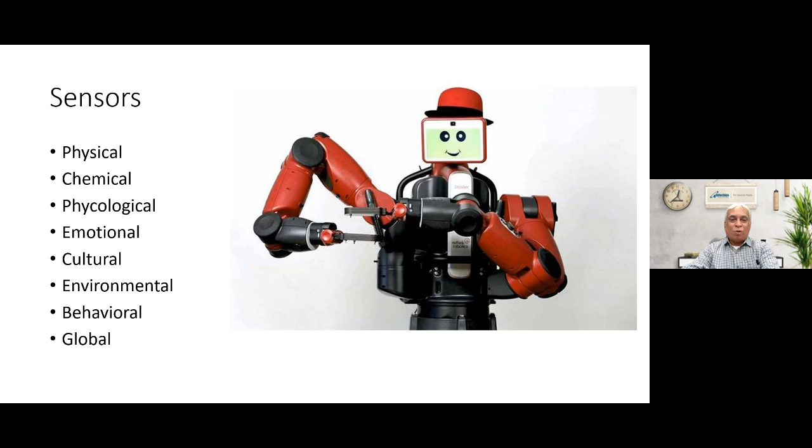Right now, the kind of computing we have shown in the previous sessions were all single board computers with single core computing hardware. But when we talk of AI and ML, we'll be having multi-core and many-core computing platforms.

Yesterday we saw the Arduino and Raspberry Pi, but they are single core or at most 4-core. Tomorrow's AI ML platforms will require NVIDIA kind of hardware with 2000 or 4000 cores within a single chip doing the computation. So my computing has to be AI ML enabled.

We'll be looking at cloud-based systems too, like Amazon Cloud, Amazon Robotics, Microsoft Robotics, or Google Robotics. These are cloud-based systems, used when we have swarm-based mechanisms with, say, 1,000 bots.

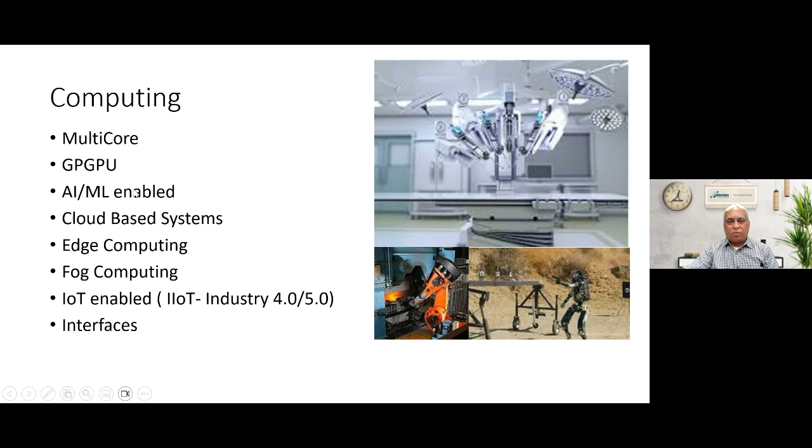Now we have Bluetooth 5.0, BLE, Wi-Fi 6 and 7. These are the new interfaces that need to be taken care of for computing. And for standards, you name the domain and there are different standards to be defined.

Right now, if we talk of the third version, ADAS level 5, the automotive industry has designed cars for it, but it's not deployed because standards and laws are not properly defined. Take any domain of robot application—it's not only engineering people, but law people also come into the picture for defining standards, or say medical science also comes into the picture for defining standards for robots.

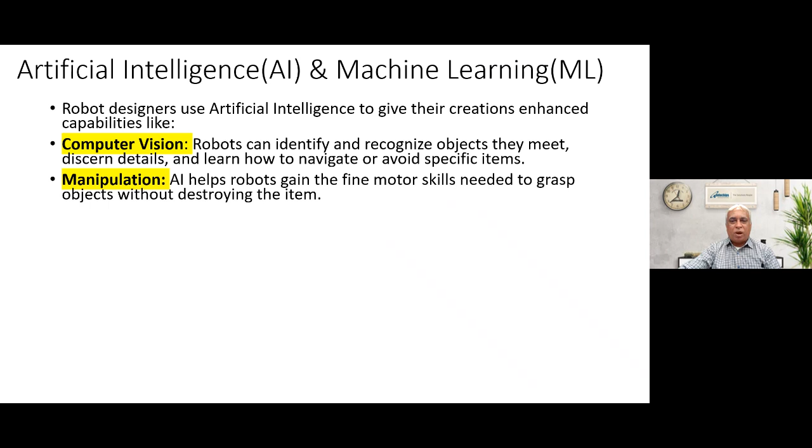AI and ML is going to be the next big revolution as far as robots are concerned. So computer vision is one of the domains. Manipulation is also very important—how motor skills will be manipulated or learned. Also motion control and navigation.

And lastly, natural language processing—how my robot learns about natural languages that need to be processed. So if I want to design a robot with emotions, or design a robot at a global level, depending upon the region it will automatically change its language. These are some of the AI and ML related domains where you can contribute for future robot generations. With this, I come to the end of the session. Thank you all—if there are any questions, maybe one or two, I'll be happy to address.

I think there are no further questions. Due to paucity of time, I have not covered a lot for ROS, but the links are there for those who are interested to work on that platform. On behalf of Nirma University Institute of Technology, I thank eInfochips and IESA for inviting us to deliver this session. Let me congratulate all the participants for their patience, hearing, and interest in learning about robotics fundamentals, applications, and future. Thank you, everybody.